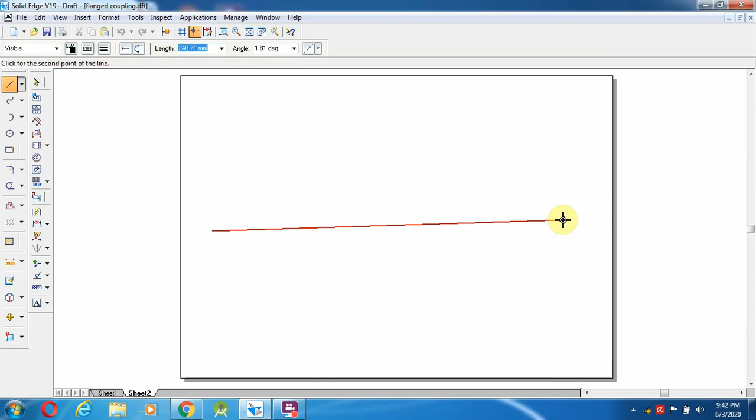Then we start to draw this flange coupling, the protected type. First I am going to draw a line here, starting with the axis line.

Now select the second one. From here, in the top they make it a sectioned view, and in the bottom the normal front view is provided. So those things we have to draw here.

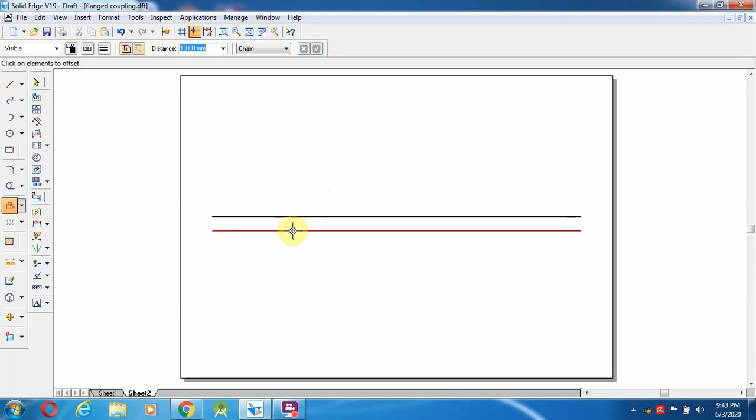The diameter here is 20 mm, so I am going to use the offset command. This has to be offsetted. Since the diameter is 20 mm, that means 10 mm distance on each side, so I make 10 mm in the top as well as in the bottom.

We have to keep this dimension as 0.5 mm. As you already know, projection lines are 0.13 mm, drawing lines and object lines are 0.5 mm, reference lines are also 0.13 mm, and the XY line is 0.35 mm - we have to maintain these.

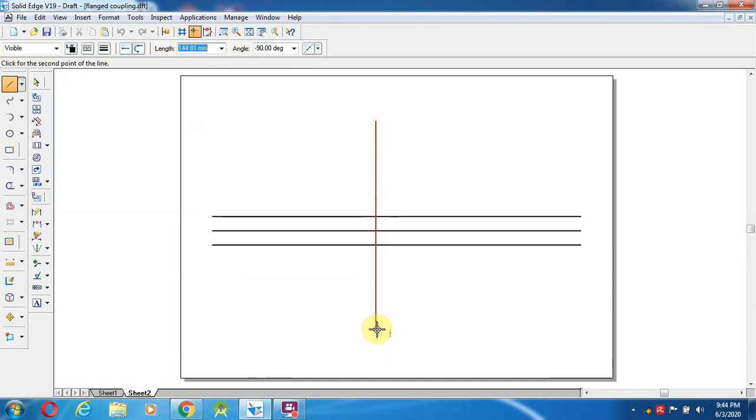Once this dimension is done, we move to the next one. Before that, first we will draw the vertical axis. To draw the vertical axis, you can draw it anywhere in the drawing. Select a line from here, I am going to choose from here to here to draw the vertical axis.

After drawing the vertical axis, from here to here is 1.25d plus 20, measured from the axis to that side - that is the dimension for that circular portion's end. From here to here, the height is 1.5d plus 25 mm. These values you have to remember.

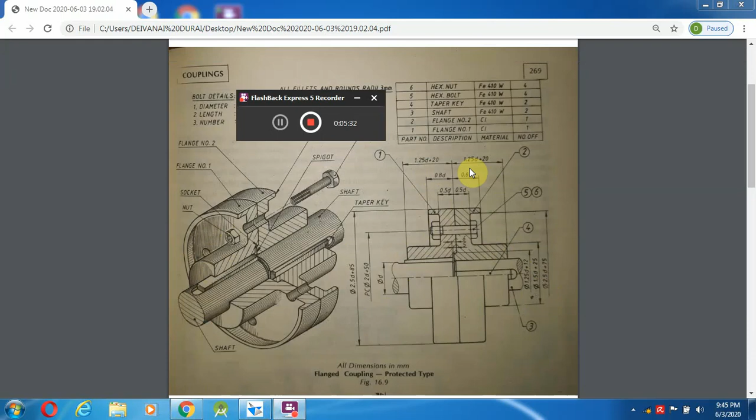1.25d plus 20 mm - so going back here, I already calculated 1.25d plus 20 mm, which comes to 45 mm. So go here, mark 45 mm.

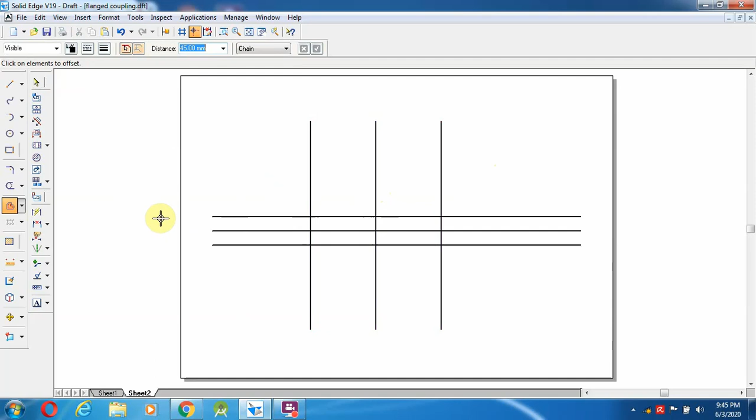Select again the offset command from here to 45 mm distance, enter towards left, and again select from here also the same distance. I am going to stop over here. Then choose from middle to this length, the upper length first, which is 1.5D plus 25.

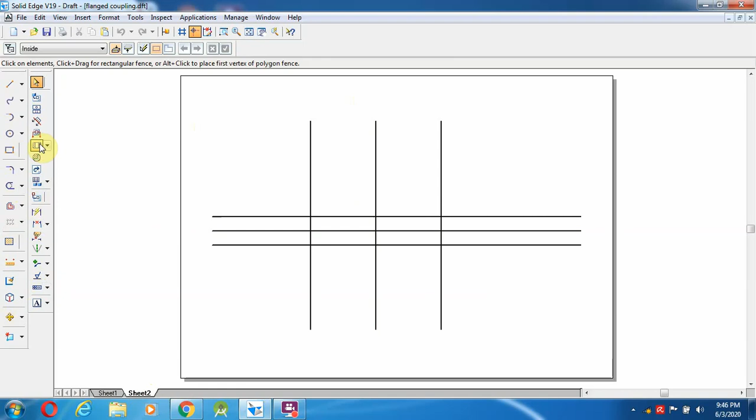So go over here, 1.5D plus 25 gives us 55 mm. Select line, midline, meaning axis line. I have not converted the axis line yet, because we are going to keep offsetting the distance. So offset from here.

1.5D means 55 mm. So 1.5D plus 25, go over here 1.5D plus 25 equals 55 mm, from here half top, half bottom. So it will become 25, 26, 27.5 mm.

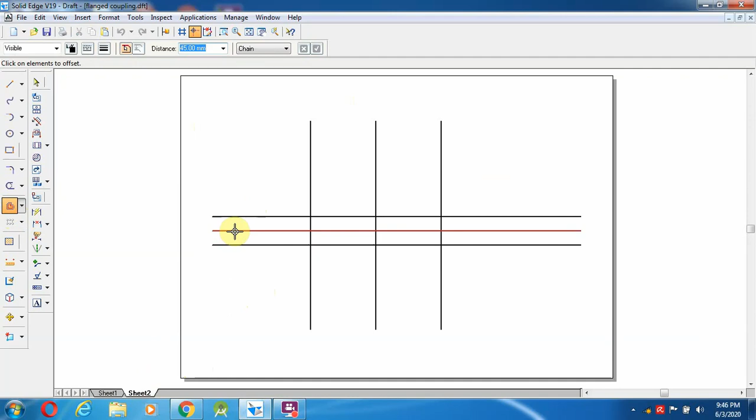Select a line, offset from here to 27.5 mm top, and again select down. You can keep over here. Now what are all the things required - go to the trim option.

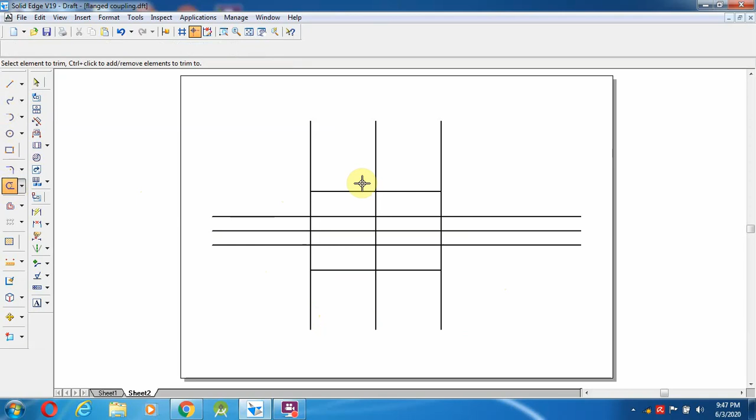This is the line I don't require, this one. These things I am going to delete. Same even here - so this line also, somewhat it has to be required over the top, it does not require. So even in the top also we can trim it.

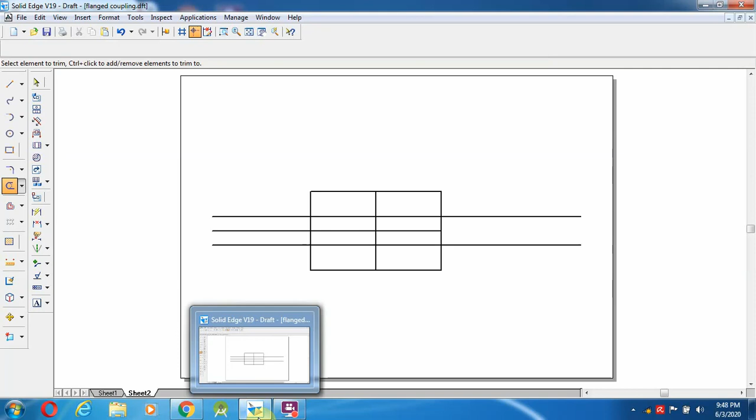So after trimming this, even in the top view, front view - so even in the front view from here to here it won't require, but anyway we are going to keep it over here. Afterwards we can trim over that. Then comes the next one.

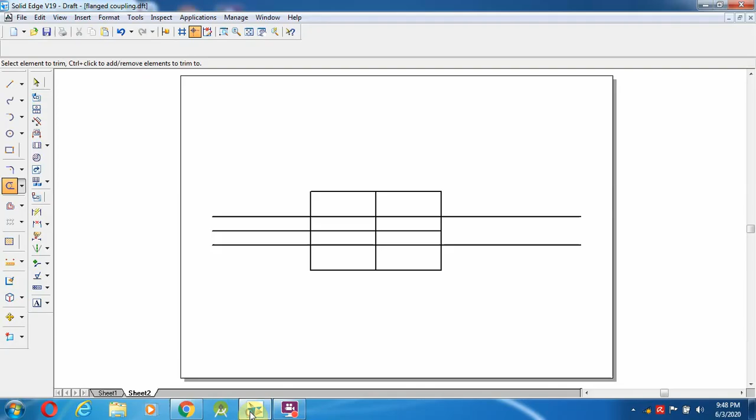So what is the next thing we have to draw? 1.5D plus 25, then the top one we will do it. So the top one, 2.5D plus 75 for this bottom one - in the top surface, the bottom thing is 2.5D plus 75. Select things, 2.5D plus 75, which gives 125 mm.

125 mm means 62.5. So go here, select again offset command from here to 62.5 mm distance.

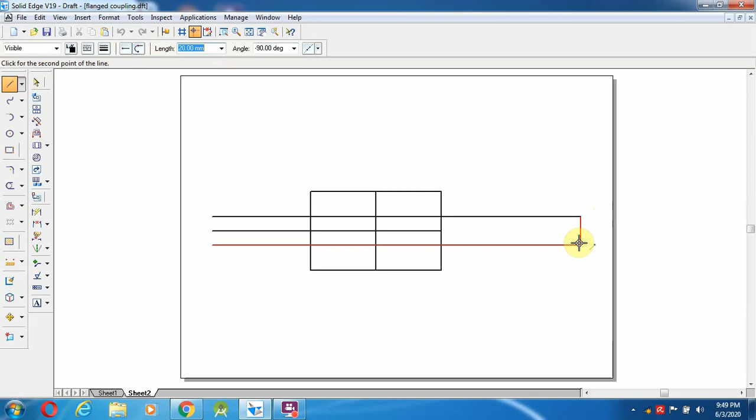Select a line for reference purpose. I am going to extend, extend to the next one. Then this line I am going to trim, delete, and select offset option from here to 62.5 mm, enter, and again you can select from here 62.5 mm.

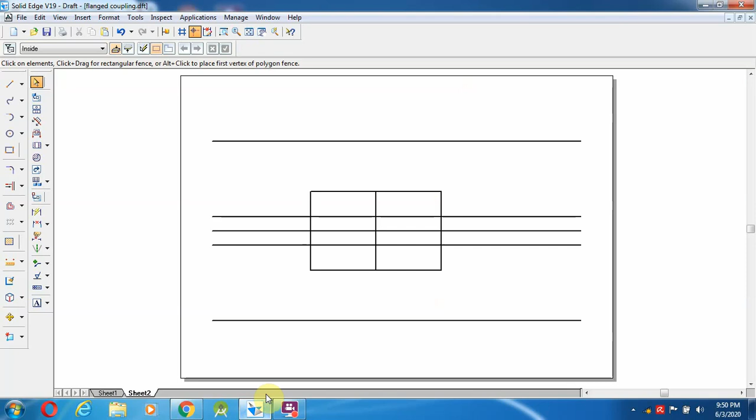So that is 2.5D plus 75. So for this one, the top, the small thickness is coming out - those things, the top length depth. How much mm? That is 2.5D plus 85. So what is the value? 2.5D plus 85 equals 135.

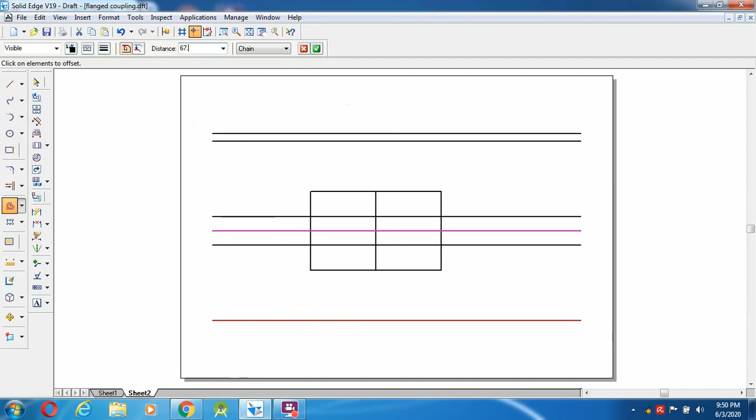135 means 67.5 mm. Go over here, select offset to next, from here to 67.5 mm, enter. So from here to 67.5 mm. Here the original top view is coming, so this line is not required over here - anyhow I drew this line. So finally we can delete it, whichever things are not required, those lines I am going to delete.

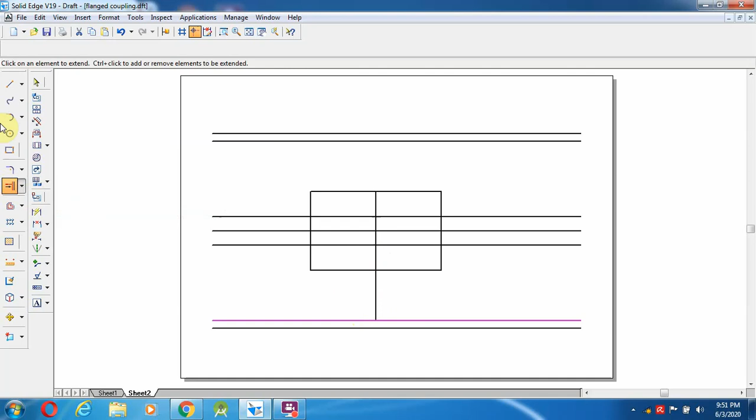Now I am going to use this extend-to-next option towards that, extend to next. Go to here, extend to the next, extend to the next.

After that, first initially you can save it as the flanged coupling - keep on saving your files. Then after this is done, what is the next step to do? From middle towards we have to move 0.5D from this side, and 0.8D, 0.8D.

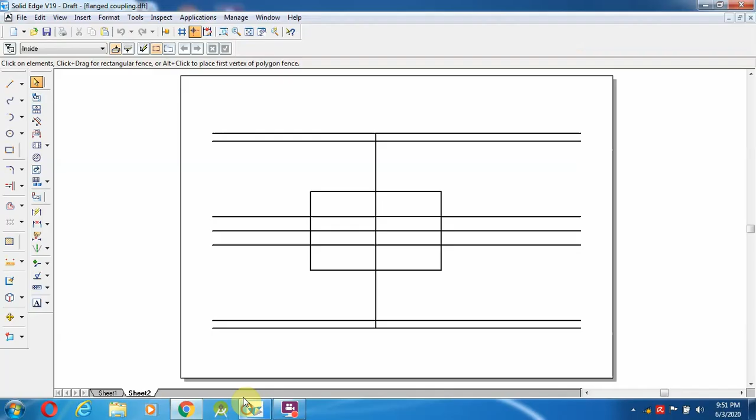So go over here, select offset command - what is the value? 0.5D is 10 mm and 0.8D is 16 mm. So from here to 10 mm offset, keep, again select from here to 10 mm distance. Then once again select this one, 16 mm distance from this side.

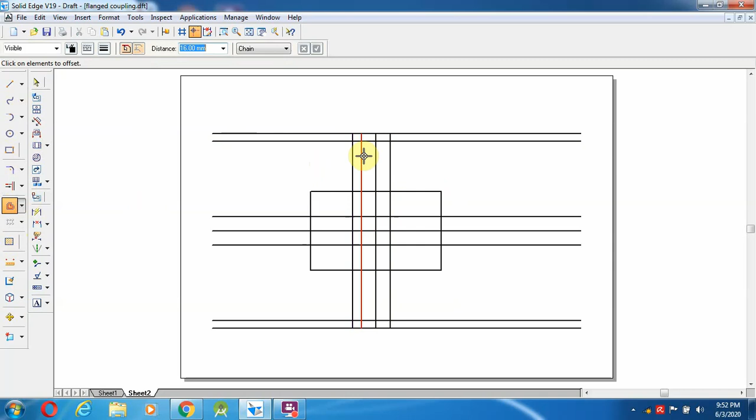So they clearly mention 0.5D from here to here, middle to - same like 0.8D from the middle. So those lines we have done over here. I am going to use the trim option, to trim the unnecessary lines.

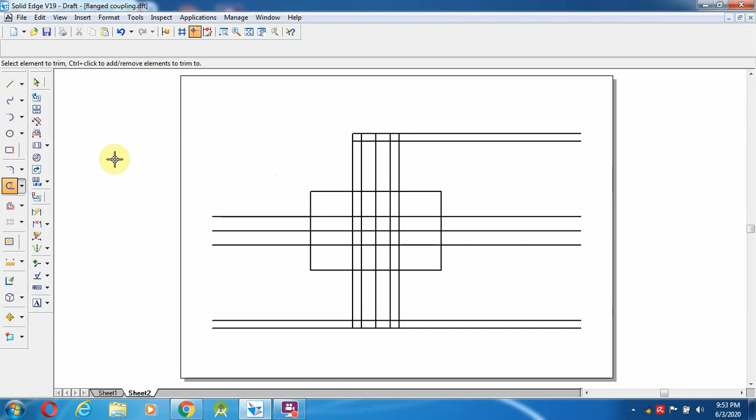So which are all the unnecessary lines over here? This is the line, and this is another line I am going to trim over here. Then you can go and check over that. So here these lines - for now this line I am going to trim it, for friends, otherwise it will get confusing. So here also these lines I am going to trim.

I told you about this line as well as this line, I am going to trim it. Finally I am going to draw those things. Then after trimming here and coming to the middle, we are going to keep it, then we can construct the bottom one.

Okay, before that I'm going to make a shaft over here. The shaft length here may be something else, that's not the thing. If you want to keep it even, we will keep it over there. So use the spline command, starting from here, ending, close, and again from here I am going to stop it.

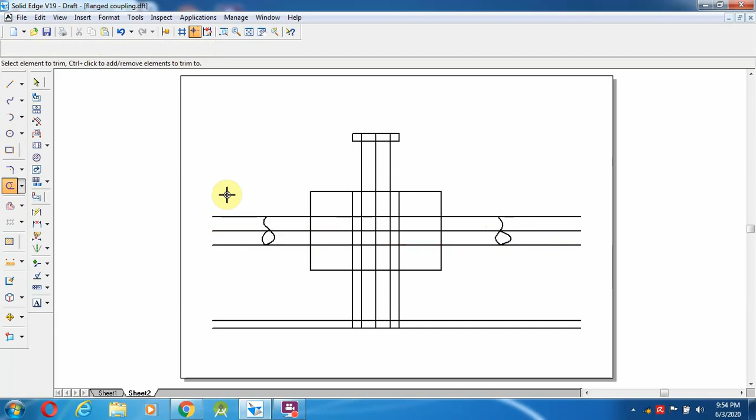Same like here, again I'm going to select from here to here. Okay, then go over here, trim is the particular thing.

So if you trim over here, that means the line is not joined to the particular line. So this I'm going to extend it. So go over here and trim. Once again I'm going to trim over there.

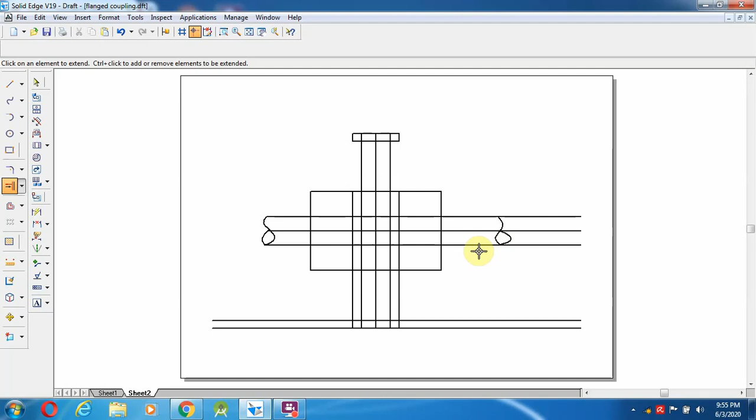So here I'm going to check. Here also the same problem. So go over here, extend to next. Then select the trim option to trim the particular surfaces.

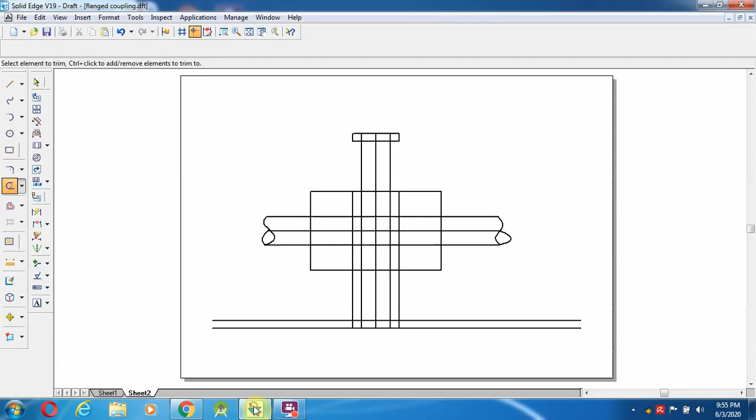After completing this, I am going to make the front view. So front view, this is the line I am going to use. So this line, it won't come in over here. It starts from here and these are all the lines, it won't come even in the mid. So these are all the things I'm going to cut.

So almost the top view is done, normal front view is over. Then which is the next thing I am going to do? So I am going to keep this

nut and bolt. So for doing the nut and bolt, see over here the bolt details. Diameter is 0.2d plus 3 mm, length is 1.5d, and number 4 for D less than 75 mm, 6 for D greater than 75 mm. That means the bolt and nut will be provided accordingly.

Suppose the diameter of the shaft is more than 75 mm, we have to use 6 bolts and nuts. Suppose it is less than 75 mm, we have to use only 4 bolts. So 1, 2, 3 comes over here, 4 comes over here, because it is less than 75 mm. So that is the thing over here.

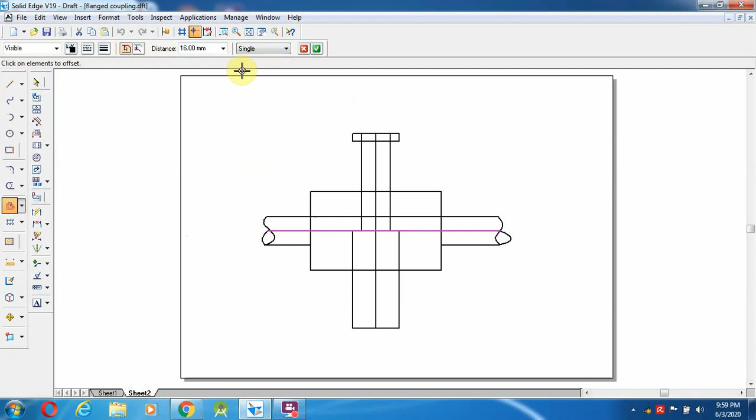So from the diameter of the nut, diameter of the bolt, the diameter of the bolt is 0.2d plus 3 mm. So here 0.2d plus 3 mm, where I calculated, so 7 mm we got.

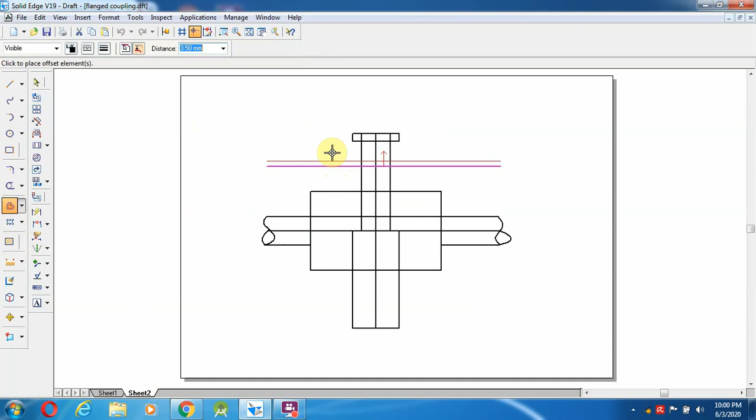So from this you can go over here, select offset option again. 7 mm means from this side, 3.5 up and 3.5 down. So down 3.5 mm. After doing these things, going to trim it. So I am going to trim for a certain length.

Trim here as well; I am going to trim here. Now select the 3.5 mm. Now what is the length of this one? The length of the bolt they have given as 1.5d. So 1.5d is 30 mm. So go here. So 30 mm is already from this length.

It is 20 mm, so the remaining 5 mm each from both the sides. So select a line, from here to 5 mm. 5 mm, and same on the other side, 5 mm I am going to keep. Then now I am going to do the bolt dia as well as this dia,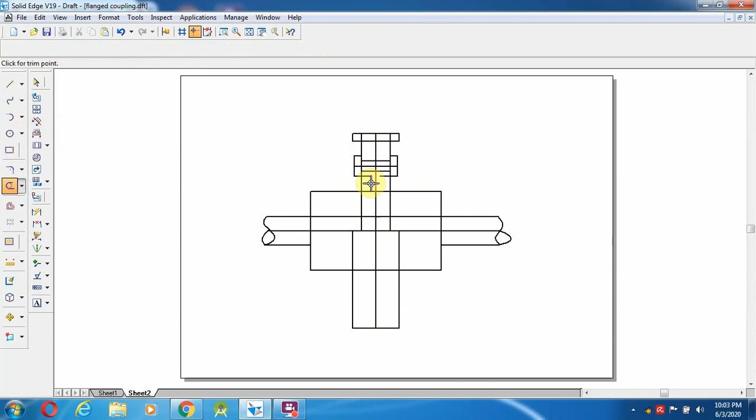So now the middle we can trim. In the small portions we could not place exactly on the lines, so that's why I extended, and then I'm going to close over here. So for the hexagonal bolt and nut, it has to become like this. So this line you can go into

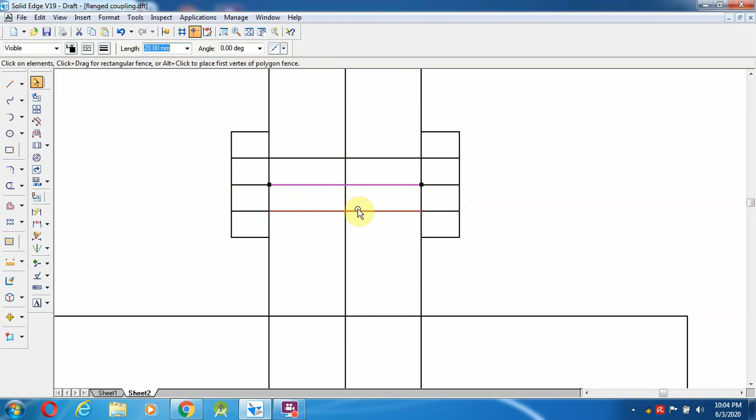Control Z, select line option, from here to this end, same on the other side also. Select the end point correctly, and here also you can stop exactly at the end point. Now this is the line I drew for my reference, so I am going to delete it.

Now select the arc by 3 point method, somewhere on the line. So you can choose. It has to come exactly in the middle. Same here also, you can keep it in the middle. So same center point. This one you can do with an approximate value.

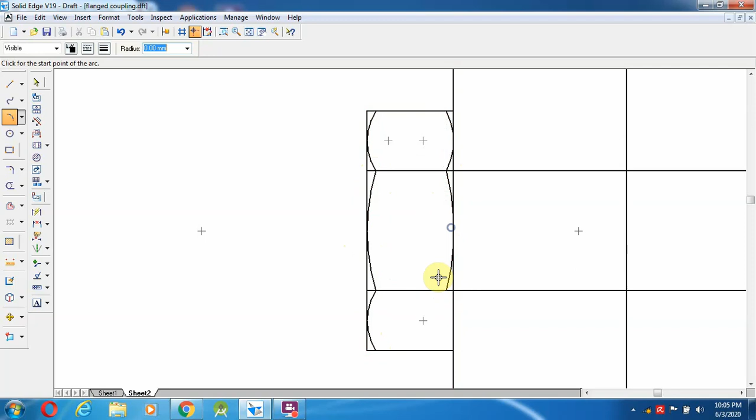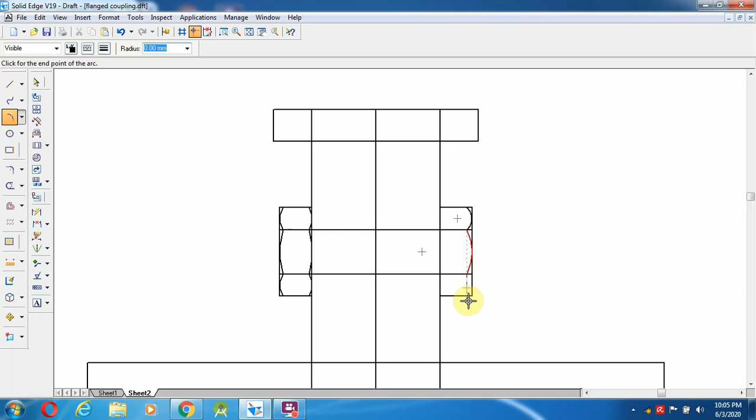Okay, so from here to the same line, and again fit. Now you can do the other side. Select this one. If it's not visible, you can increase the length. So like this, all the sides. Please zoom and do it, then only you can clearly view it.

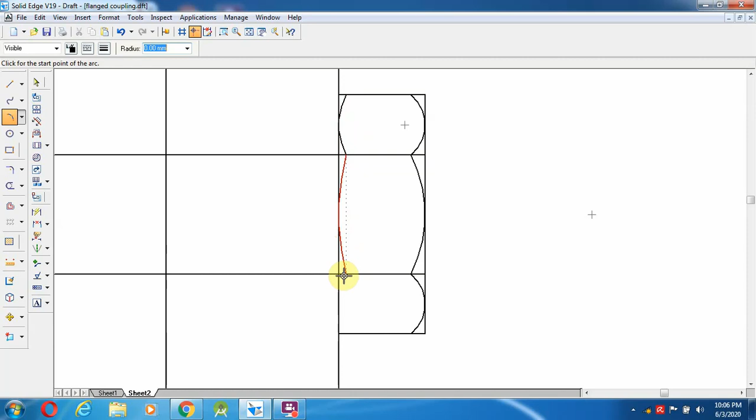How to make this hexagonal bolt in 3D, people already know. But in 2D we have to do it like this. Okay, once you do this, you can save the file. After saving, go here again. The straight line we are going to make over here. Here also the straight line has to come.

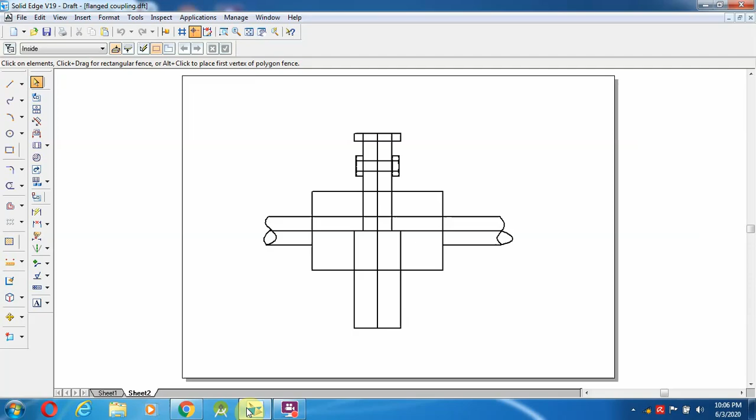Okay, then in the middle, those lines won't come there. So I'm going to trim it. Select the trim option. This one, even Control Z. The other things won't come. The middle line is coming. Here those lines don't come. So select the trim option from here as well.

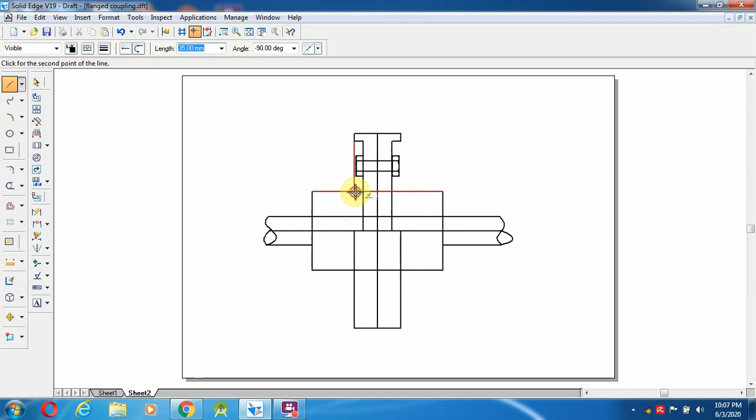This is the line I am going to trim. After trimming, as I already told you, one more line, this is the line. As of now I am going to cut it, afterwards I will draw it because I am not getting it here. Here it will be a small extension, so you can do that also. Select a line from here straight to here, even here also.

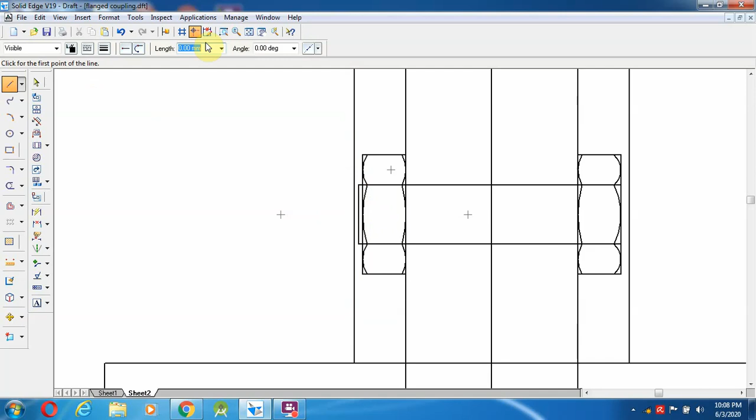Okay, now I'm going to zoom to a particular position. From here, the thread portion indicates which is the bolt and which is the nut. This is the bolt and this is the nut. For indicating that, a small pin has to be extended here. After extending, you can save.

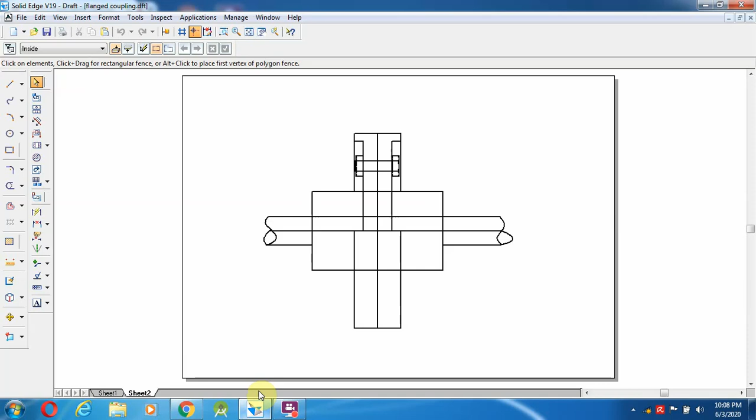After saving this, what is the next portion to draw? Almost the entire thing is drawn. The only thing left is this taper key. While doing this taper key, we have to make some assumptions here. Now I am going to change the middle one to an axis line. This one you can also keep the same.

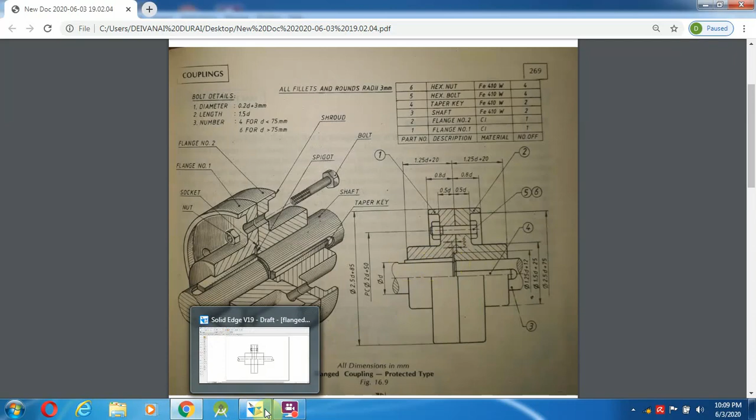So now from the vertical axis line in the middle, at 5 mm and 6 mm distance, this taper key has to be placed. Okay, so first I am going to make the 6 mm and 5 mm distances.

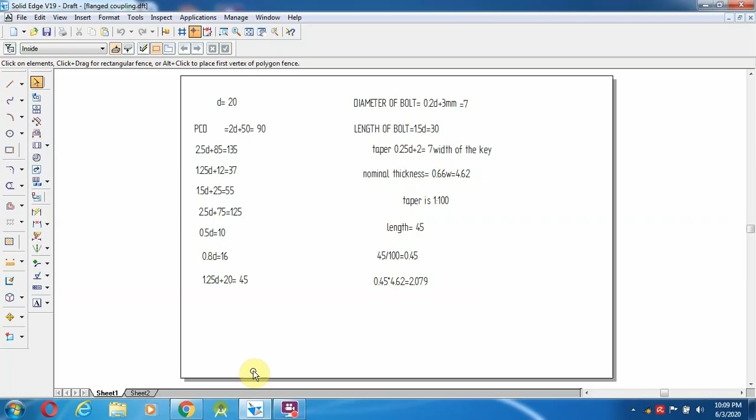Before that, the dia is this one, they have given as 1.25D plus 12 mm. So 1.25D plus 12 mm. What is the value? 37 mm. So 37 mm means go over here. So select the offset option.

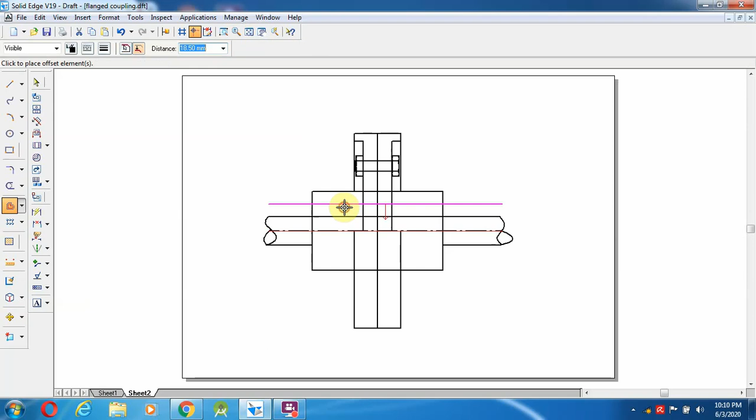Single, 37 means 18.5. So 18.5 mm I'm going to make over here. So 18.5 mm is done. So now in this area I'm going to zoom, because they have given only the line over here, even you can check with this.

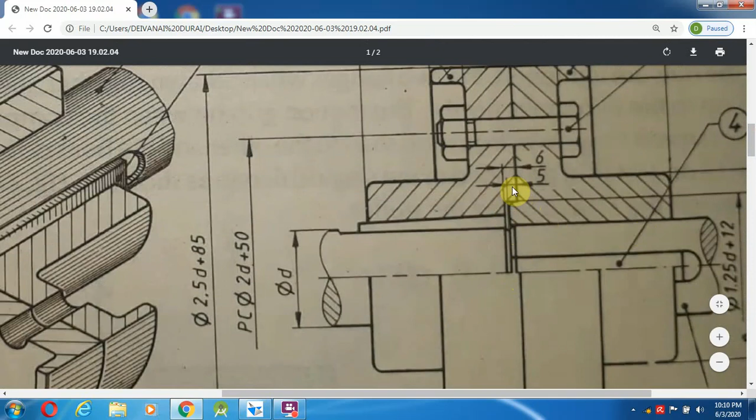So in those lines, from here at 5 mm distance one line is coming, and at 6 mm distance one more line is coming. Okay, so select a line, same like this we can offset. So single, from here the 5 mm line, again this one the 6 mm line, enter.

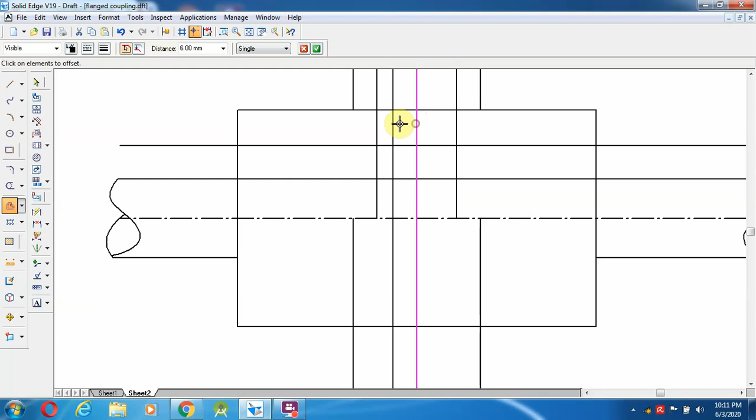Select the offset option from here. Okay, the 6 mm line I got first. Next single, so this is the 5 mm line. So those 6 mm and 5 mm lines I have drawn. Those 6 mm and 5 mm lines come from below this line.

So I'm going to trim those things. Okay, I think those lines are also not required over here, so this also I am going to trim. Okay, so after doing this, again from here one more line is coming, that is from here to the 6 mm line.

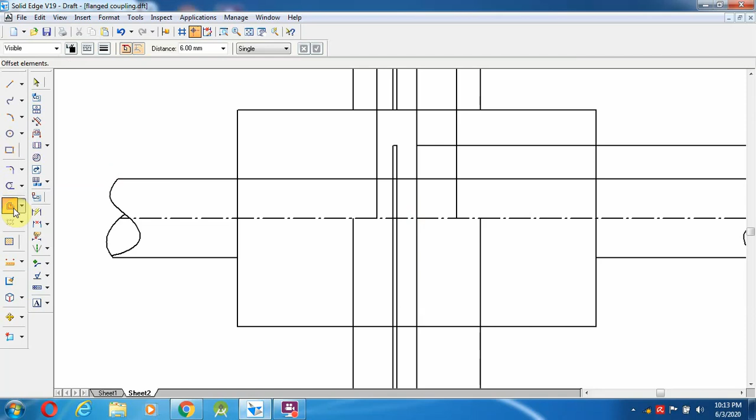Okay, so select offset, single, from the middle to this side the 6 mm line, enter. Sorry, not 6 mm. I think from here to here it is 2 mm or 1 mm, so that we have to give over here. Select offset. I'm going to give 2 mm. So from here to this side is the 2 mm line.

You can give 1 mm itself, because it shows more gap. So go over here, select single, 1 mm. Okay, 1 mm, enter. Then what is the next step I am going to do?

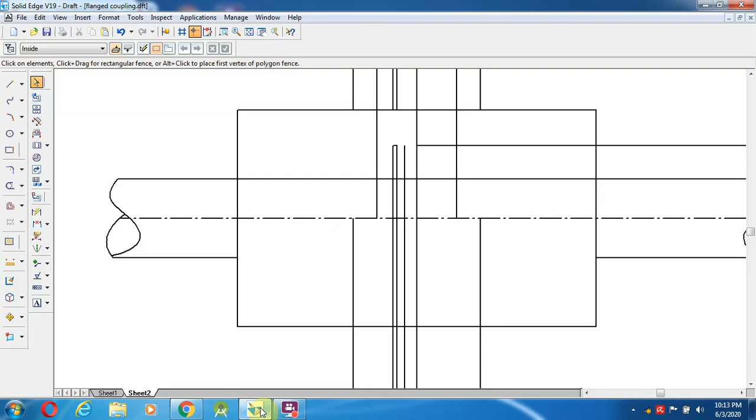Even here the line is not required. So select trim. These lines trim, even this line also. Okay, now while drawing this taper key, certain things we have to remember, certain things we have to make as an assumption.

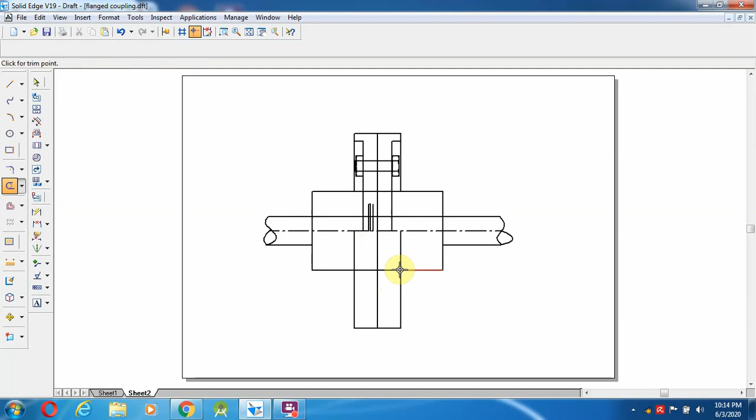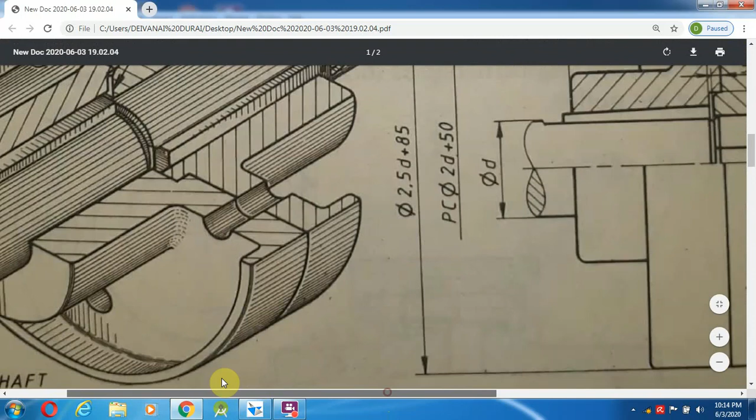So what are all the assumptions we have to make over here? Because the taper key we have to make over here. Okay, so while making the taper key, they have given the taper ratio. Where is the taper key? The taper key is here, one more key. So there are 2 taper keys, one key is here, another key is this one.

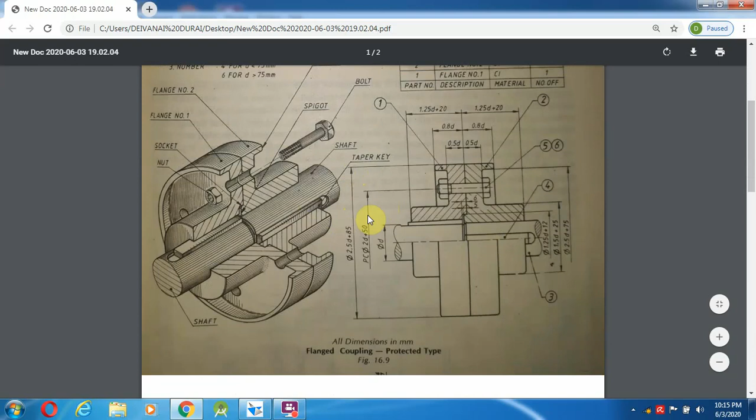So the taper ratio here they have given as 1:100, as per the taper formula. So how we are going to calculate those things: the taper key formula with the help of this value. So the taper width we can calculate as 0.25d plus 2 with the help of this formula, that is 7. And the thickness of the taper is 4.62, that is the height. So that we are going to do over here.

So 4.62, it starts from here, from this 6 mm line. Okay, this 6 mm line. So usually at the bottom, the 1 mm we are going to make as a groove in the shaft. Okay, 1 mm I'm going to make a straight line. This will be up to the shaft length. Here we can give a 45-degree line.

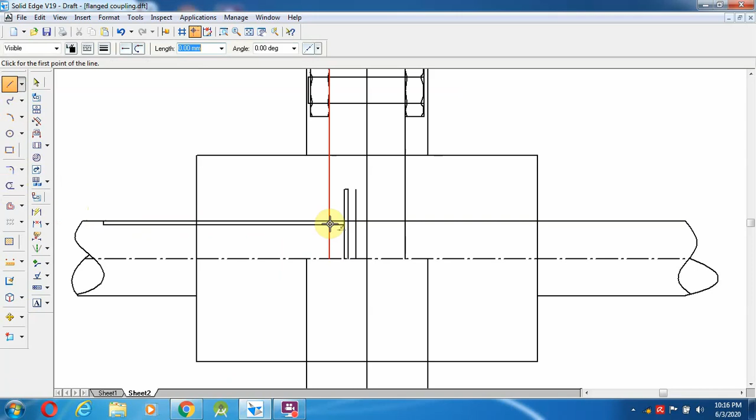Okay, after that we are going to make it 4.62 mm. Select a line. From here at 4.62 mm distance I am going to keep a line over here. Okay, then how much length does it have to go over here? This length they have not given in the problem, so we have to take it as an assumption. From here to a certain distance, 5 to 4 mm.

So whatever is required, according to that I am going to select. Okay, the full value I am going to select. For that, I will be taking the length as 45 mm. Okay, so 45 mm, taper value is 100. So 45 by 100 we are getting 0.45. That 0.45 is multiplied with the 4.62, and the other side length of the taper we are getting over here, that is 2.079.

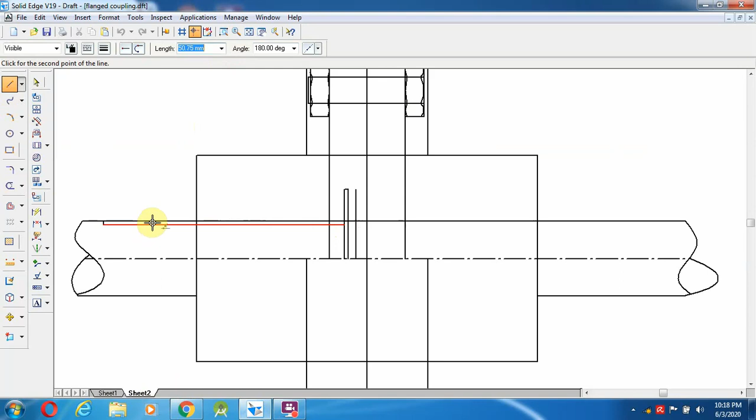So select line. From here I am going to draw a 45 mm line, because we already measured that 45 mm line. So from here to 2.079, enter, and this I am going to join to that 4-point line. Okay, so these are all the assumptions we have to make in creating the taper key, because they have not given the length from here to a certain extent. Okay, even that line is not coming.

So this line also, it's not coming over here. So once we have completed this, select offset, one single from here to this. So after that, what to do?

So from here we are going to join this line over here. Okay, this is how it comes up to the middle. So from the top it won't be there, this one. Okay, so select the trim option; this won't come over here. Okay, so only that one it is having.

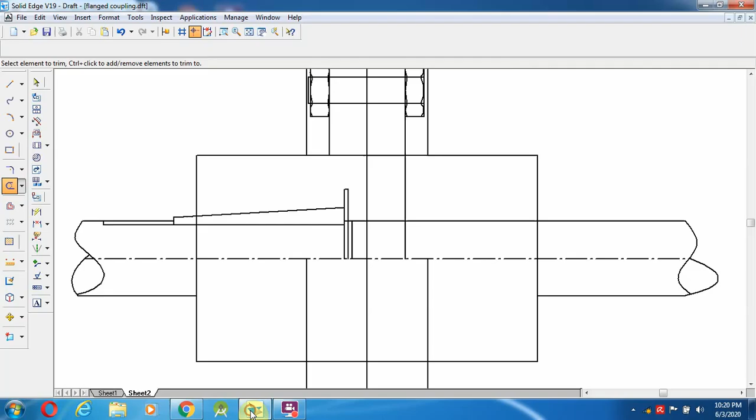So after doing this, we can go and draw this taper. So for this taper width, what do we have to choose over here? Already we calculated the taper width we are taking over here, that is the taper height over here. Okay, then we are going to select the thickness, the nominal thickness 4.62 we are taking over here.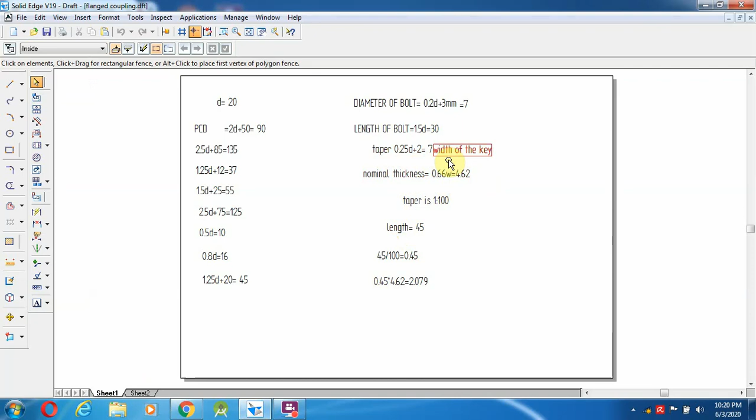So this will be 3.5, and towards, I think, the full length. Okay, now from here to 3.5, and we are going to join over here. Now select the arc 3-point method, from here to here. So this is the thing we have to make over here. Even this line also I am going to delete. So then almost the entire thing is over.

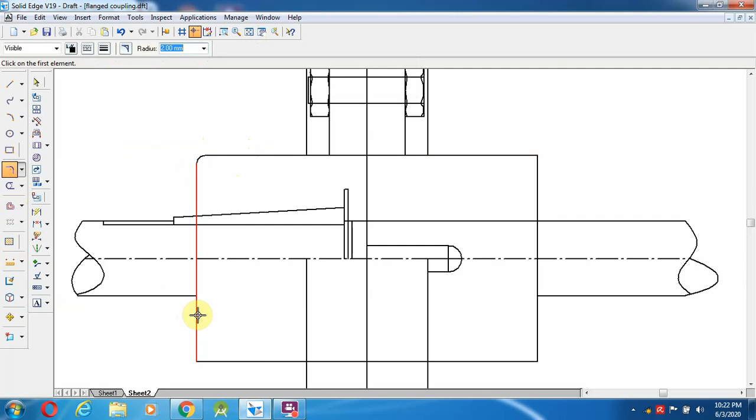But the thing is, we are going to make all the ends as a fillet with 1 mm. We can do it with 1 or 2 mm. So go and select the fillet from here to here. I am going to check with 2 mm. Okay, 2 mm is okay. So this may happen while doing the fillet. No need to worry, we can change it.

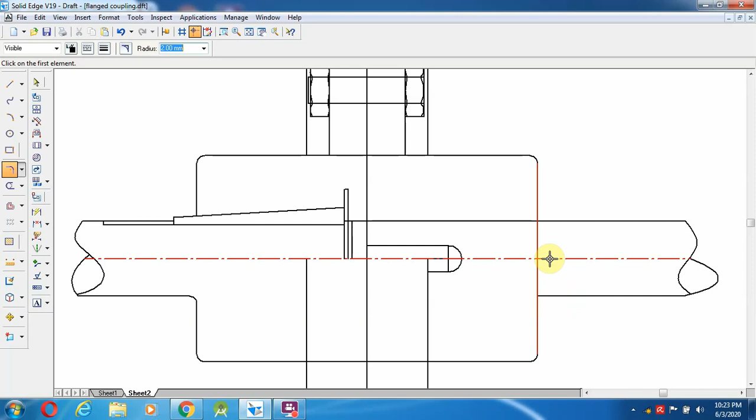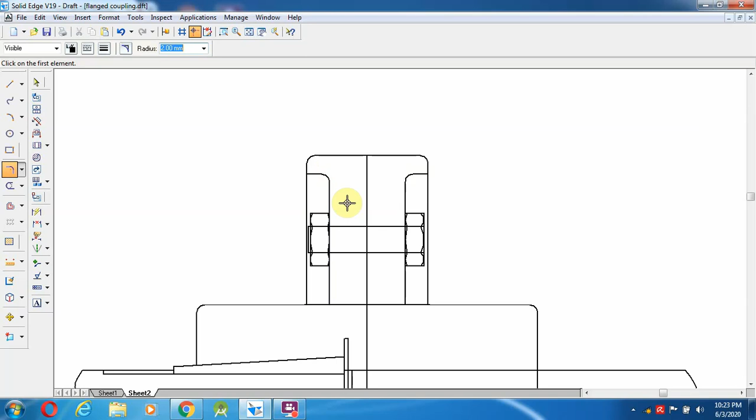Fillet, 2 mm. So all the ends, we have to make those fillets. Suppose if I want to do it here, automatically the parameter will be changing, so I am not doing that. And also in the top I am going to make it. Okay, so after doing this, I am going to use the fill option. So from here, this, even this, in the top, it's coming over here.

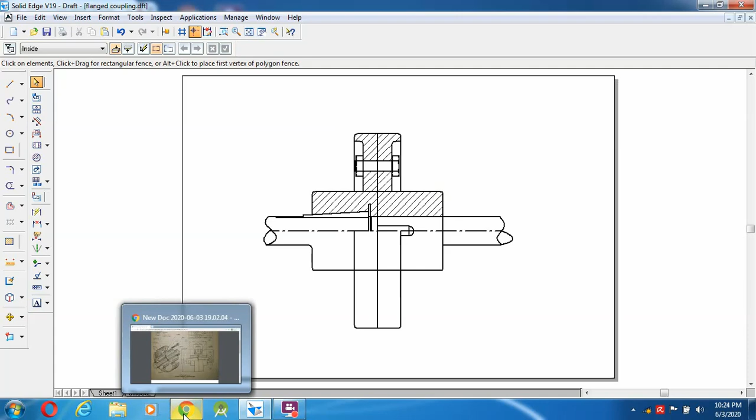So what is the thing? 1, 2, 3. These are all the things that come, and the remaining thing we have to keep in mind. Here one point you have to remember: the feather, that means the taper key, is also a solid part. If you cut there, the part will also be cut, but wherever you make threading, ribs, or keys in a section, in those areas we are not going to mark the sectioning, that means hatching lines. It will be the exceptional case for hatching. Okay, so that is the point you have to remember.

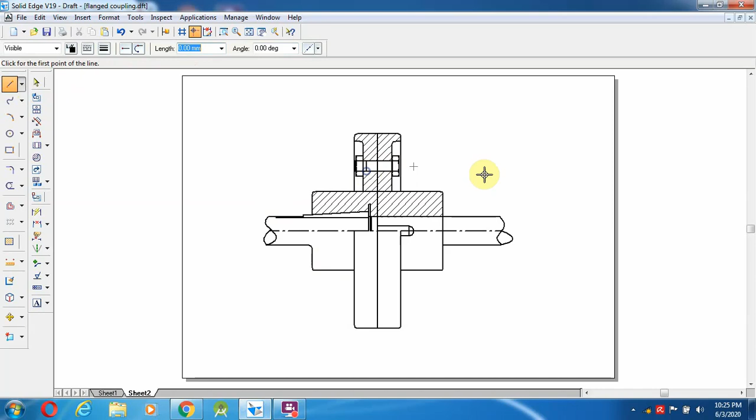So is anything else left out? These lines here, they will be coming. Here also the midline is not trimmed. In the top almost everything is correct. Here the small line will be extended up to the threaded part; no need to mention it, even if you make some line over here, it's not an issue. Okay, so that is the meaning of threading there. And the taper lines and the fillet have to come over here as well as here.

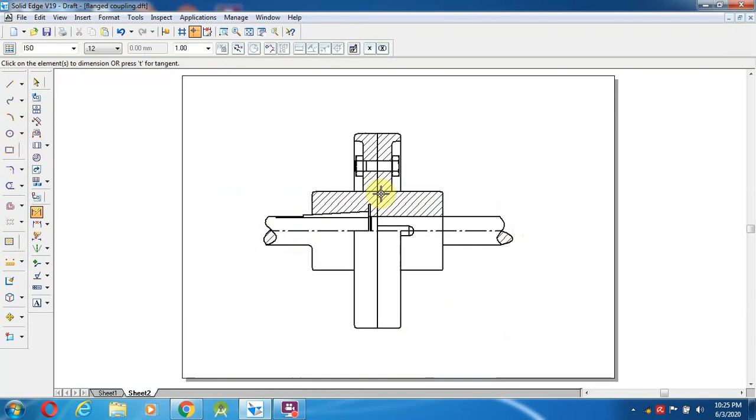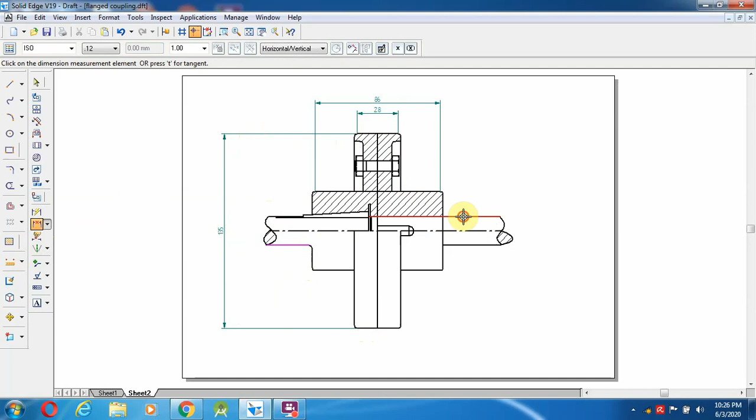Okay, so this way we have to do this type of protected type flange coupling. After this, please give the dimensions. All the dimensions you have to give compulsorily, even the shaft dimension. So all the dimensions we have to give over here, then close. With that, the flange type coupling is over.